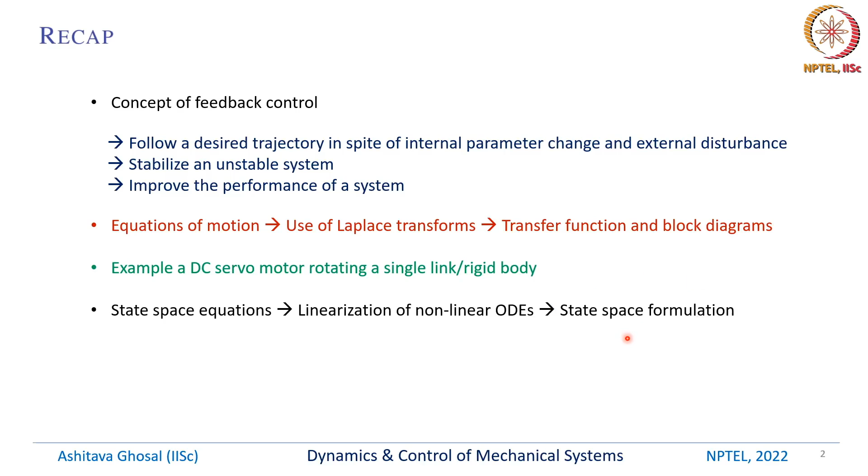Let us look at a broad classification of dynamical systems. Dynamical systems, which change with time, can be described by a partial differential equation or by ordinary differential equations. In our case, for a multi-rigid body system or even a single rigid body, we had ordinary differential equations, which can be of three kinds.

One is called SISO, single input single output systems. We could also have SIMO, single input multi output systems, and then the most general case, multi input multi output, or MIMO. The ordinary differential equation could also be linear or nonlinear.

If nonlinear, we could have time varying or time invariant systems. If time varying, the state equations can be written as x dot equals function of x, u, and t, where u is an external input and t is explicit time, since sometimes these equations have time explicitly in them. We could also have an output equation, y equals h of u, t.

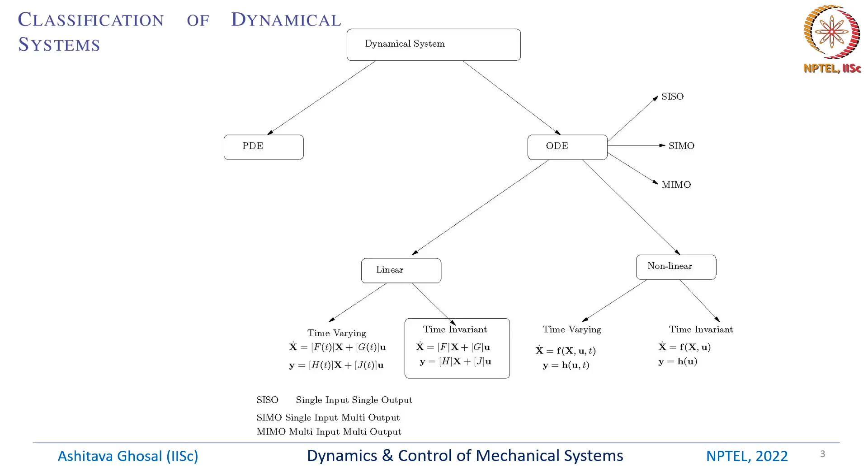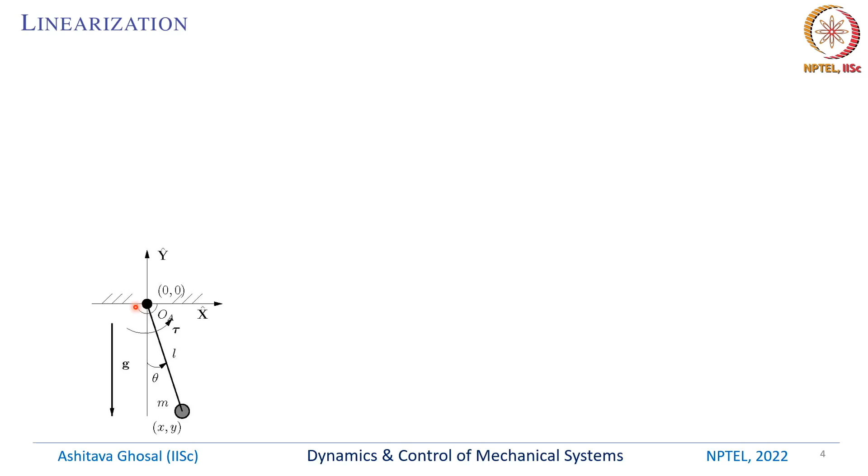So let's look at an example of linearization. We have this simple example of a pendulum, a massless rod with a mass at the end, rotating about this z-axis. The rotation angle is theta from the vertical. There is gravity acting, and we'll also assume there is a torque acting at this joint, applied by a motor.

So the nonlinear equations of motion for this pendulum, if you write it in state space form, we can write it as x dot equals f of x, u. If you want to linearize these nonlinear first order differential equations, we have to linearize about a point. Which point do we choose? Most of the time, the standard approach is to use linearization about an equilibrium point.

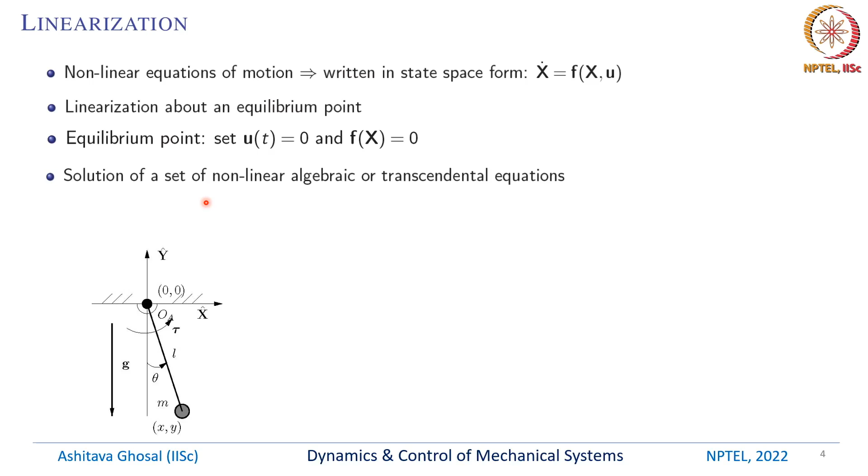How do we find the equilibrium point? It is obtained by setting u, which in this case is torque, equal to 0, and then we solve f of x equal to 0. This is a nonlinear algebraic equation. The solution of this set of nonlinear algebraic or transcendental equations will give me x, and these are the equilibrium points. It could be any algebraic or transcendental equation, but at least conceptually we can solve them. We find all x such that f of x equals 0, and more than one equilibrium point is possible.

So again, the example of the pendulum. The equation of motion is theta double dot plus g by L sine theta equals tau by mL squared, which we'll call u of t. Using state variables x1 and x2, where x1 is theta and x2 is theta dot, my state vector X is x1, x2, a 2 by 1 vector. In state space form, x1 dot equals x2, and x2 dot equals minus g by L sine x1 plus u of t. We derived these first order equations from the second order equation using x1 as theta and x2 as theta dot.

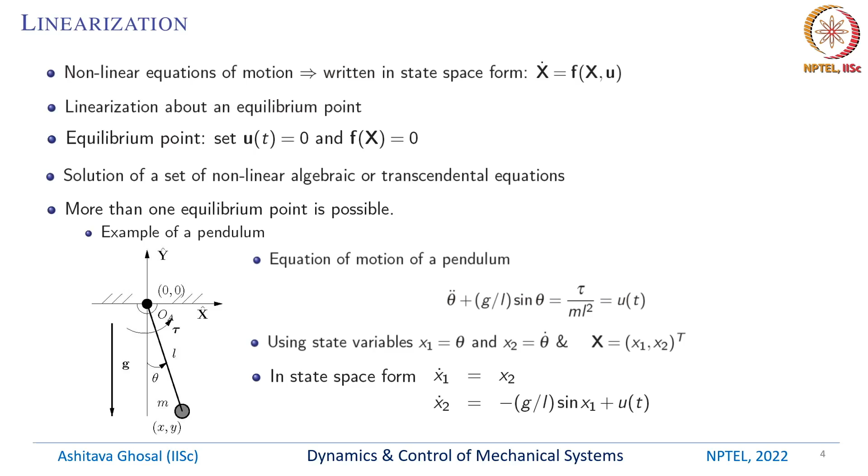Continuing with the simple pendulum example, we want to find the equilibrium point for those state equations. The first step is to set u(t) equal to 0. Then the function on the right hand side will be equal to 0 when x2 is 0 and x1 is equal to 0 or pi. If you linearize about x1, x2 equal to 0, 0, we substitute sine theta equals theta, and the two first order differential equations can be written in this form.

X1 dot is x2, as written in the previous slide, and x2 dot now becomes minus g by L times x1 plus u of t. It was g by L sine theta, but theta is the same as x1, so it's minus g by L x1. This is the F matrix and this is the G vector in this case.

If you want to linearize about pi, 0, remember x1 could also be pi. What is pi? It is standing vertically upwards. What is x1 equal to 0? The pendulum is hanging down. So if you linearize about pi, 0, you get sine(pi plus theta), which is minus sine theta, giving you minus theta, since for small theta, sine theta is the same as theta.

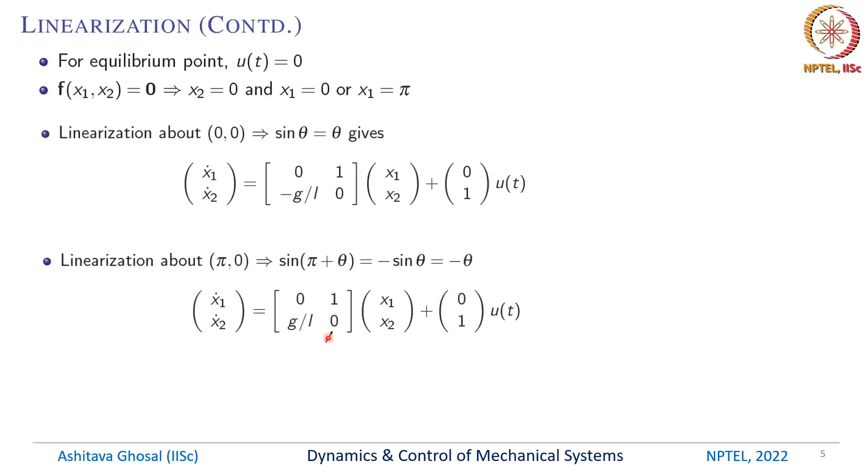So in general, what can we do? We can use Taylor series. Instead of simply saying sine theta is the same as theta and doing these simple things, we can formally linearize any nonlinear differential equation using Taylor series, and again we linearize about an equilibrium point.

So let's assume we have a set of nonlinear differential equations, x dot equals f of x comma u, where x is an n by 1 vector and u is an m by 1 vector, so the number of inputs could be less than the number of states. So x is an element of Rn and u is an element of Rm.

We are going to linearize about an equilibrium point. What is the equilibrium point? All x comma u such that x dot equals 0, which implies all x comma u which satisfy the vector nonlinear set of equations f of x comma u equal to 0. These are nonlinear algebraic or transcendental equations, so you can have more than one solution for f of x comma u equal to 0.

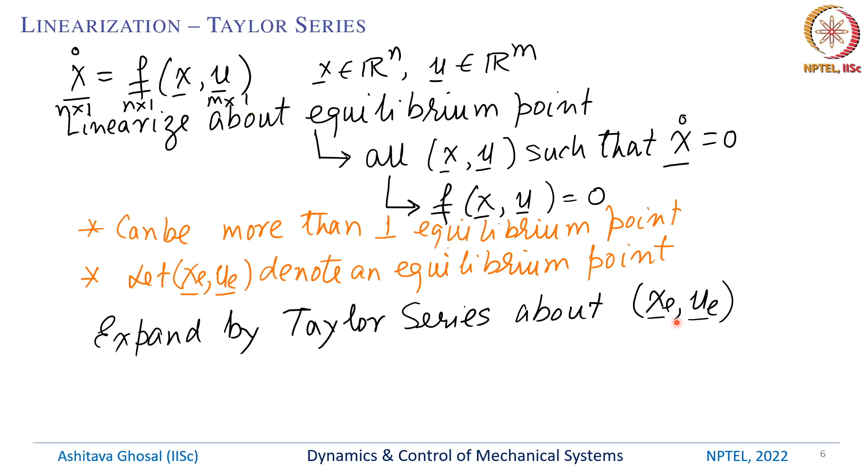So basically we can have more than one equilibrium point, and we need to linearize about a chosen equilibrium point. Let xe comma ue denote the equilibrium point we are interested in. We can expand the right hand side using Taylor series about xe comma ue. What is the expression for Taylor series?

So any one of these functions, let's say fi of x comma u, can be written as fi of xe comma ue plus the partial of fi with respect to xj, for j equals 1 through n, evaluated at x equals xe and u equals ue, times delta x. This is the first term in the expansion of the Taylor series.

And what is delta x? It is xj minus xj at the equilibrium point.

We can also look at the partial of fi with respect to uk, because remember there is an x and a u. So for k equals 1 through m, summation of partial fi with respect to uk, again evaluated at x equals xe and u equals ue, multiplied by delta u, and delta u is uk minus uke, and then plus higher order terms, order 2 and order 3.

So we are going to drop all the higher order terms, and the first term is also equal to 0. Why? This is the definition of an equilibrium point, so fi of xe comma ue must be equal to 0.

So what you are left with is one part which is the partial of fi with respect to xj times delta x, and the partial of fi with respect to uk times delta u. Both of these terms can be written as x tilde dot equals some matrix F times x tilde plus some matrix G times u tilde.

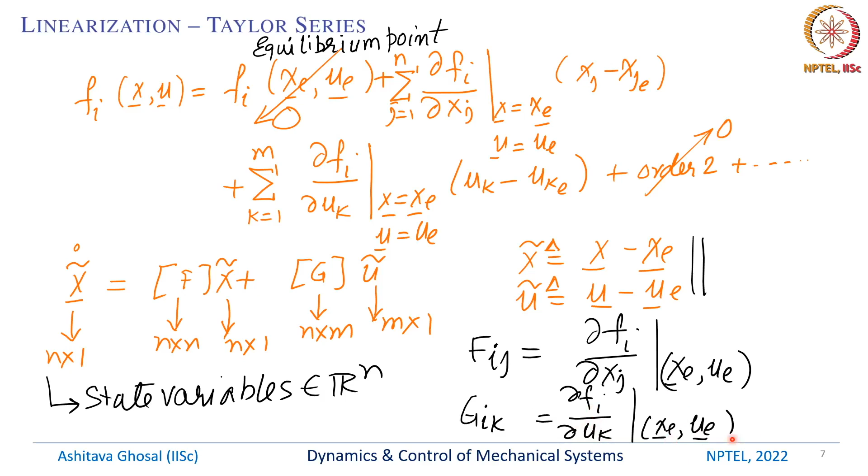Similar to the state equation, we can also look at the output equation. Here we assume y denotes the output, which is also a vector, but there are only p of them. So the number of state variables is n, the number of u is m, and the number of measurements or output variables is p.

And p will be less than or equal to n. Again, we can use Taylor series to expand this nonlinear equation about xe and ue. Similar to the state equations, we get y tilde equals some matrix H into x tilde plus some matrix J into u tilde. What is ye? It is the equilibrium point, the function h evaluated at xe, ue, and y tilde is y minus ye.

So what are the elements of the H matrix? Hij can be written as the partial of Hi with respect to xj, evaluated at xe, ue. The elements of the J matrix are obtained as the partial of Hi with respect to uk, again evaluated at xe. So what are the dimensions of y?

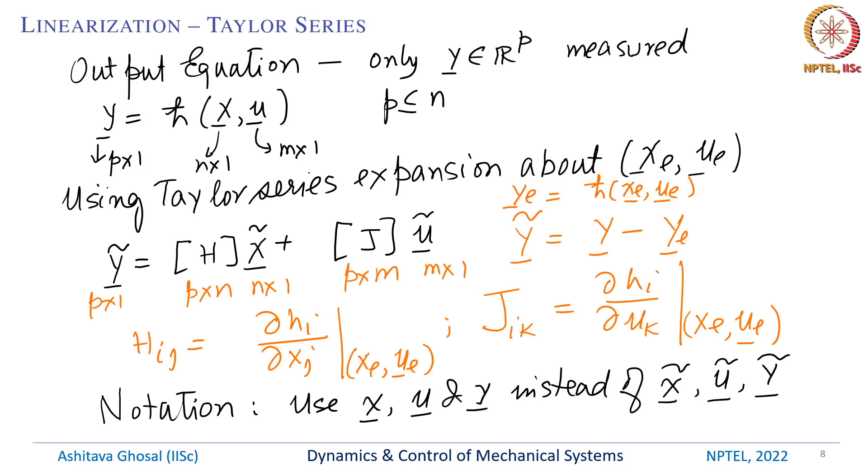So in summary, we can obtain the state space formulation of a linear time invariant system in two sets of equations. One is the state equation, x dot equals F into x plus G into u, where x is an element of R^n and u is an element of R^m. Then we have an output equation, y equals H into x plus J into u, and y is an element of R^p.

So to repeat, x are the state variables, with dimension n cross 1. u are the control inputs, with dimension m cross 1. y are the outputs or measured outputs, with dimension p cross 1.

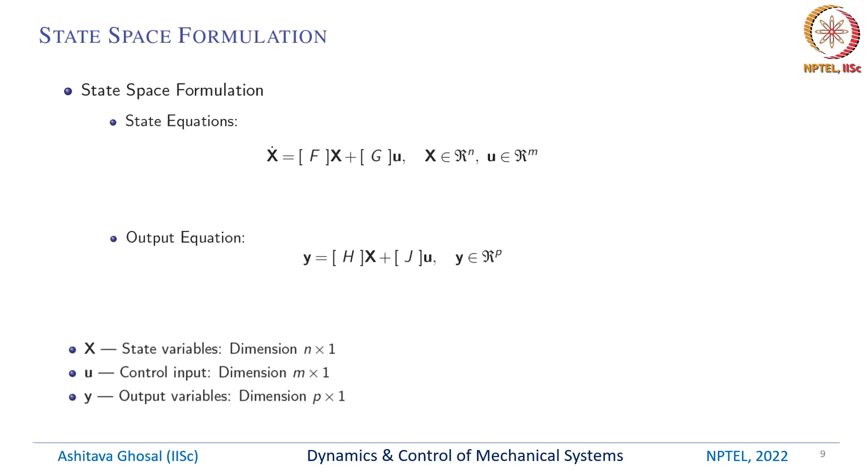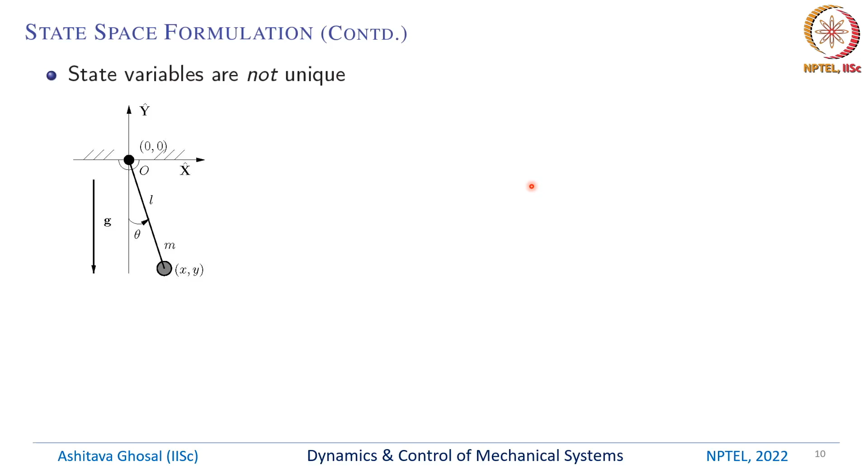Let us continue. One of the most basic issues in state space formulation is that state variables are not unique, and I will show you an example using this planar pendulum again. We have a pendulum with a mass oscillating with angle theta, gravity acting this way, and we had chosen the two state variables x1 and x2 as theta and theta dot.

We could also use another set of state variables, x1 tilde and x2 tilde. x1 tilde is defined as omega0 times theta, and x2 tilde is the same as theta dot, so x2 tilde is same as the earlier x2. However, x1 tilde is a scaled version of the previous x1, where omega0 squared is g by L.

Now if you obtain the state equations, you get x1 tilde dot equals omega0 times x2, and x2 tilde dot equals minus omega0 squared sine of x1 divided by omega0, plus u of t. If we linearize about 0,0, we get, in terms of x1 tilde and x2 tilde, like x dot, an F matrix of 0, omega0, minus omega0, 0, times x1 tilde, x2, plus 0 and 1 times u of t. You can see that the F matrix has changed.

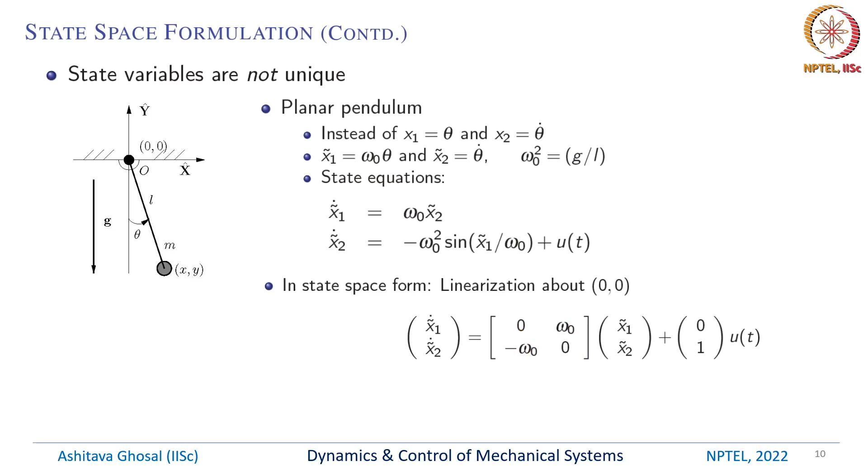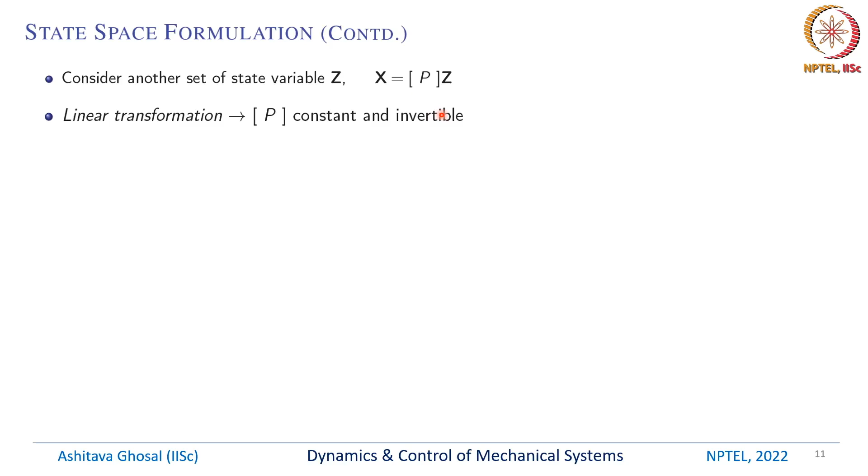In general, we can have another set of state variables z, related to x by a linear transformation: x equals P times z, where P is constant and full rank, so P is invertible. Since x is n by 1, z is also n by 1, and P is an n by n constant, invertible matrix.

Now in terms of z, we can write the state and output equations in this form. Recall we had x dot equals F x plus G u.

Now we have x is pz, so p into z dot is f into pz plus g into u. Remember, p dot is 0. So if you were to worry about what happened when you did x dot, should we get a p dot into z? No, that term is 0. So x dot will be p into z dot, which is what is here.

And likewise, we have y is h into p into z plus j into u. So we could rewrite these state and output equations as z dot is p inverse f p z plus p inverse gu, and y is h p z plus j into u. Remember, p is invertible, so p inverse exists.

So the first basic question is, how do we know that both these systems are the same? If you are an analyst using x as your state variables, you would have got x dot is equal to fx plus gu. If you are another analyst using z as your state variables, you will get z dot is p inverse f p z plus p inverse gu, and the output equation is y is h p z plus j u. So it is not clear, and remember these are all numbers, that we are describing the same system. So what is common between this description using z and the previous description using x? Let's continue.

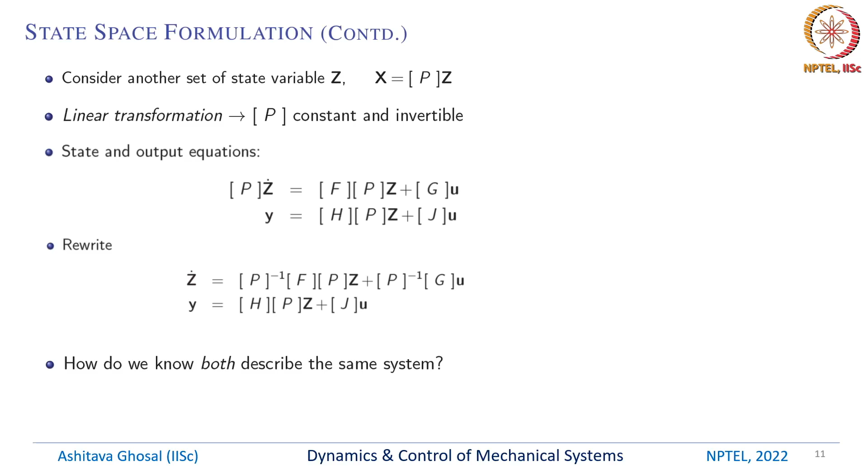So what is common between F and P inverse FP? Let's start with that. One important thing, if you have studied linear algebra, is that you can look at the eigenvalues of this F and P inverse FP. So what is the eigenvalue problem? We have to solve a characteristic polynomial, which comes from setting the determinant of lambda I minus P inverse FP equal to 0, where I is the identity matrix.

So this we can simplify as determinant of lambda into P inverse P, since I could be written as P inverse P, minus P inverse FP, equal to 0. Again we can simplify and write this expression as determinant of P inverse times lambda I minus F times P. So basically we take P outside, giving P inverse times lambda I minus F times P equal to 0. The determinant of a product of three matrices is the product of the determinants of each one. So we can write determinant of P inverse, then determinant of lambda I minus F, and then determinant of P, equal to 0.

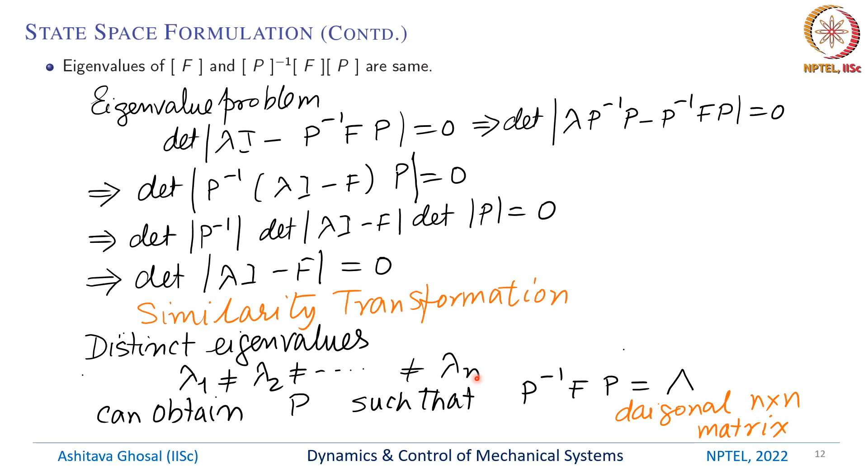So how do I find out what P is? Firstly, P is an n by n matrix because we are doing P inverse F into P, so all of them are n by n matrices. There is a very nice formula to obtain P. This is called the Vandermonde matrix. You can look at this very good book on linear algebra by Golub and Van Loan.

So what it says is, to obtain this P, we put in the first column 1, lambda 1, lambda 1 square, all the way till lambda 1 to the power n minus 1. The second column is 1, lambda 2, lambda 2 square, all the way till lambda 2 to the power n minus 1, and the last, nth column is 1, lambda n, lambda n square, all the way till lambda n to the power n minus 1. And remember, we are discussing the case where lambda 1, lambda 2, all the way till lambda n, are distinct eigenvalues.

So if you were to use this matrix P, then P inverse FP will be a diagonal matrix with lambda 1, lambda 2, all the way till lambda n on the diagonal, and all other elements are 0.

If lambda 1 is equal to lambda 2, so let's say two of them are repeated, then the P matrix can also be determined. The first column of the P matrix is 1, lambda 1, lambda 1 squared, all the way to lambda 1 to the power n minus 1. The second column, corresponding to lambda 2, is 0, 1, 2 lambda 1, all the way.

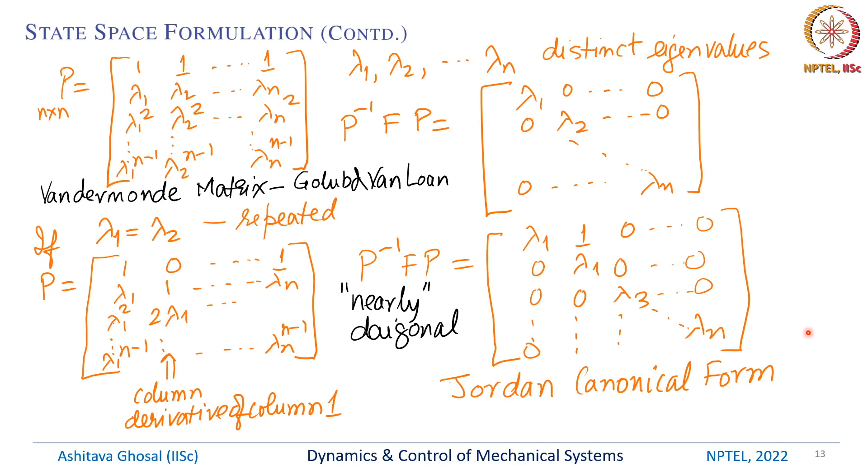So while you are solving for the eigenvalues of a matrix, you can also get complex eigenvalues. So we can have a lambda 1 which is a plus ib. The second eigenvalue will be a minus ib. This is a property of complex numbers. So one of them is an eigenvalue which is a plus ib, the other one must be a minus ib.

So in that case, if you do P inverse FP, what you can see is you will get AB minus BA, and again, since we are taking only two of them equal, you will have lambda 3 all the way till lambda n, and all the off-diagonal terms to be 0. So this is the best we can do if you have complex conjugate eigenvalues.

Of course, there could be more complications. You can have many of these eigenvalues equal. So if there are three of them equal, then you will have some things happening in the first column of P, the second column of P, the third column of P. The third column is the derivative of the second column, which is the derivative of the first column, and so on. So you will have some more complications. It will not be exactly diagonal, but it is still a Jordan form.

You can also have repeated complex eigenvalues. You can find out what happens when you have repeated complex eigenvalues, what happens to P inverse FP. So this diagonalization or this Jordan canonical form are very useful for state space formulation. We will see that in the next few slides.

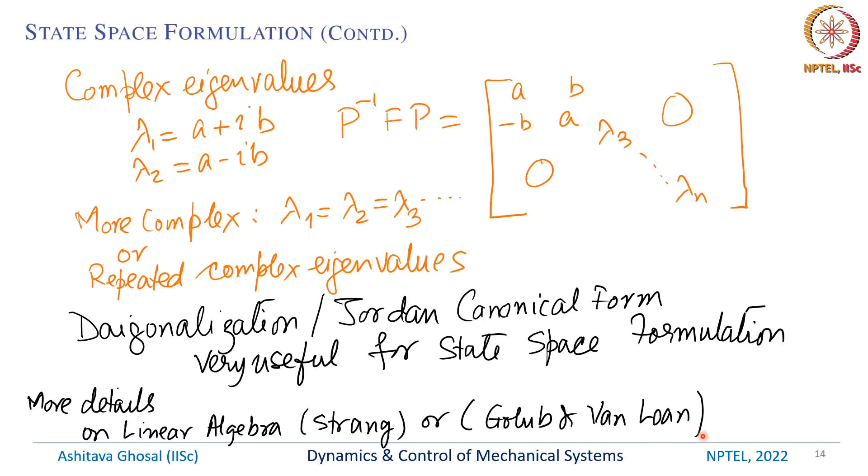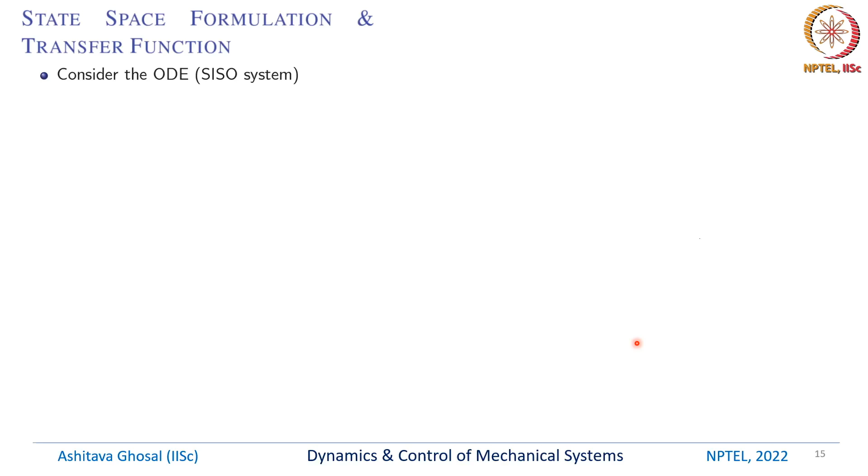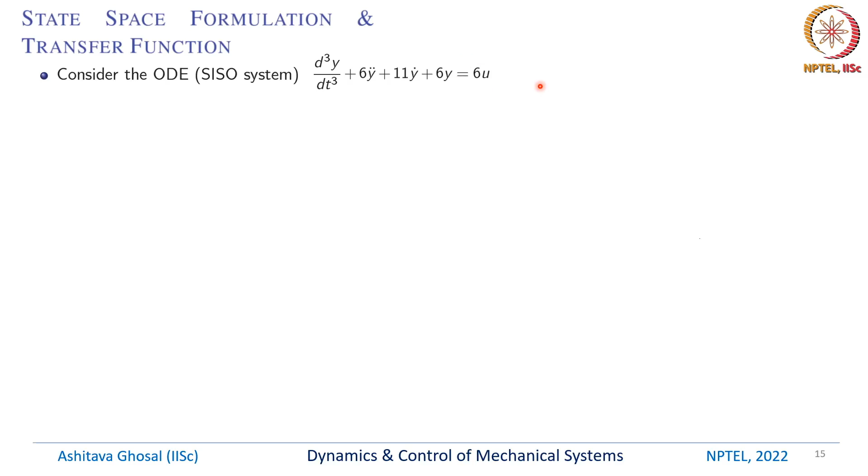So let's go back to state space formulation and transfer function. Let's consider an ODE, and in particular a single input, single output system. The ODE is given in this form: the third derivative of y with time, plus 6 y double dot, which is the second derivative of y, plus 11 y dot plus 6y is equal to 6u. This is my ordinary differential equation describing a single input, single output system.

So if you were to use Laplace transform on this, what will you get? The output is y of s, input is u of s. So this will be s cubed into y, this will be 6 s squared into y, this will be 11 s y, and this is 6y. All the initial conditions are 0 — whenever we take Laplace transform, we assume that the initial conditions are 0. So what is the transfer function between y and u?

It is 6 divided by s cubed plus 6s squared plus 11s plus 6. I have chosen this example because we can now very simply do a partial fraction expansion of this.

If you remember what a partial fraction is, we can write this as a divided by s plus something, plus b divided by s plus something, plus c divided by s plus something. It turns out it can be written as 3 divided by s plus 1, minus 6 divided by s plus 2, plus 3 divided by s plus 3. So this transfer function y of s divided by u of s can be written as the sum of these three fractions.

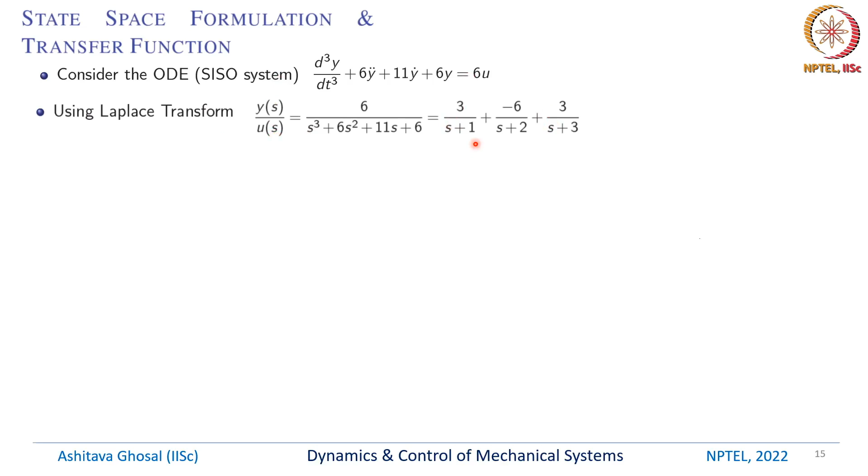So in the block diagram form, I can represent this as follows. I have an input u of s and output y of s. First, this is multiplying by 6 u of s, and 6 into u of s is given by y times s cubed plus 6s squared plus 11s plus 6. So that could be written in this way.

So what do we have here? We have a block which is 1 by s, called an integrator. Remember, the Laplace transform of 1 by s into something is nothing but the integration of that quantity. So we have 1 by s, and the output of that you multiply by minus 6, and then put it back here.

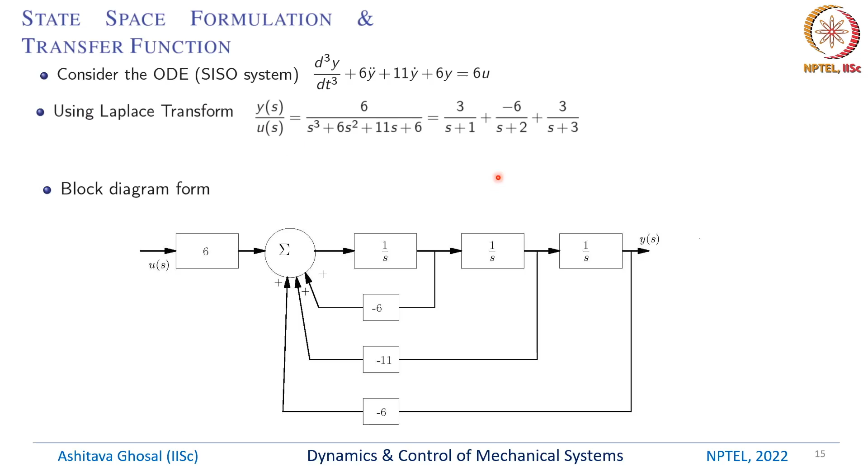Let's look at the state space form of this equation. This is a third order ODE, so there are 3 state variables. The first equation is x1 dot is x2, x2 dot is x3, and x3 dot is minus 6x1 minus 11x2 minus 6x3 plus 6u.

What is the output variable? That is x1. So we can rewrite these three first order equations as x dot equals f x plus g u. What is x here? It is 3 by 1, a vector of x1, x2, x3. So x dot is x1 dot, x2 dot, x3 dot, which equals f into x.

What is the first row of f? You can see from this equation that x1 dot is nothing but x2, which is 0, 1, 0 into x1, x2, x3. The second equation is x2 dot equals x3, so the second row of f will be 0, 0, 1. Then the third equation is x3 dot equals minus 6x1 minus 11x2 minus 6x3 plus 6u, so this row is minus 6, minus 11, minus 6.

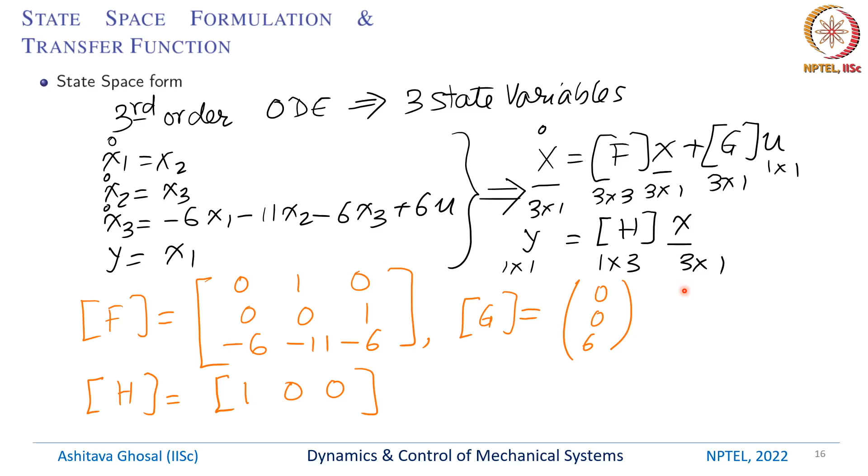How about the output equation? Y is equal to h x. What is the single measurement we are doing? A single output, which is x1, so h is 1, 0, 0 into x. So y is 1, 0, 0 into x1, x2, x3, meaning y is equal to x1.

The eigenvalues of f are obtained by solving the determinant of f minus lambda I equals 0. Since f is a 3 by 3 matrix, the characteristic polynomial would be cubic, and when you expand it using all the elements of f, you get lambda cubed plus 6 lambda squared plus 11 lambda plus 6 equals 0.

So the characteristic polynomial is same as the denominator of the transfer function. This is a very, very useful observation.

And what are the roots of the polynomial? They are lambda 1 is minus 1, lambda 2 is minus 2, lambda 3 is minus 3. So these are distinct roots.

Okay, so hence we can find P using that Vandermonde matrix. Remember, the first column was 1, then lambda 1, then lambda 1 square. Second column was 1, lambda 2, lambda 2 square. Third column was 1, lambda 3, lambda 3 square. Okay, so lambda 1, lambda 2, lambda 3 are given here.

We can compute lambda 1 square, lambda 2 square, lambda 3 square and all the terms, and we will get P, which is this. P inverse can also be calculated. This is a reasonably simple matrix, and you can also go back and use MATLAB.

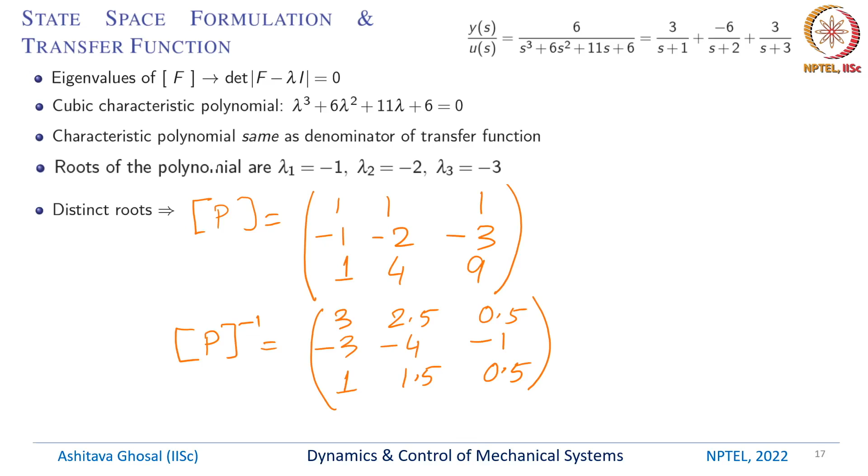So as I said, let us choose a new state variable z, which is x equals P times z. So the state equations in terms of z are z dot is P inverse F P z. Go back and see the formulation, and then P inverse G u.

So what do we get? We know what is P, we know what is F, so you can substitute and we can do some simplification. Okay, then you will get z1 dot, z2 dot, z3 dot, and what do we expect? We expect it to be diagonal. Remember, P inverse F P will become a diagonal matrix. That was the purpose of finding that P matrix.

So Z1 dot will be equal to minus Z1 plus 3 into U. Z2 dot is minus 2 Z2 minus 6 into U, and Z3 dot is minus 3 Z3 plus 3 into U.

And how about the output equation, which is y is equal to H into P into z. Again, P is, we know that. So what you will see is, if you simplify this, you will get 1 1 1 into z1 z2 z3. So what have we got?

So we had one form which is x dot is equal to Fx plus Gu, and now we have another form which is z dot is equal to some matrix times z plus some other matrix times u, and likewise we had y is equal to Hx. Now we have y is some matrix times z.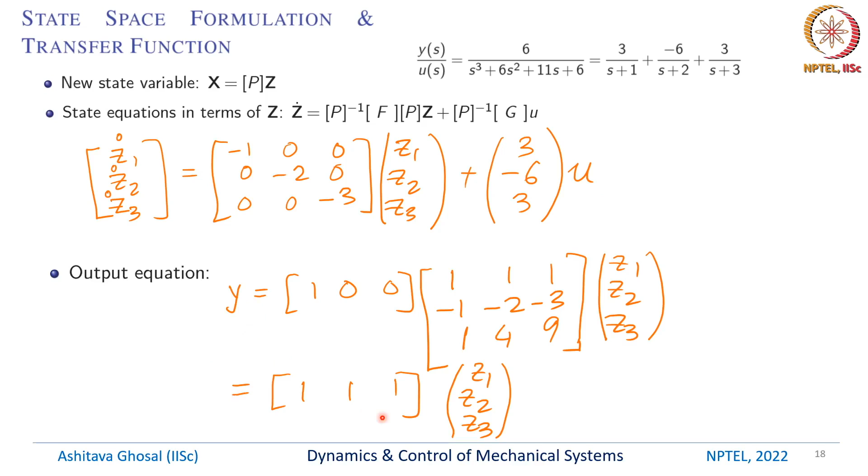So let's write this transfer function in a block diagram form. Okay, so now what you have is u, which is coming in, and then you can see that you have to multiply u by 3, minus 6 and 3, and then whatever is the output here you integrate once and you will get z1, and then you feed back minus 1.

Similarly, whatever you integrate, you will get z2, and then whatever you have you integrate here, output of this input, and you will get z3. And then when you add z1 plus z2 plus z3, you will get y of s. Remember, y is 1 1 1 into z1 z2 z3.

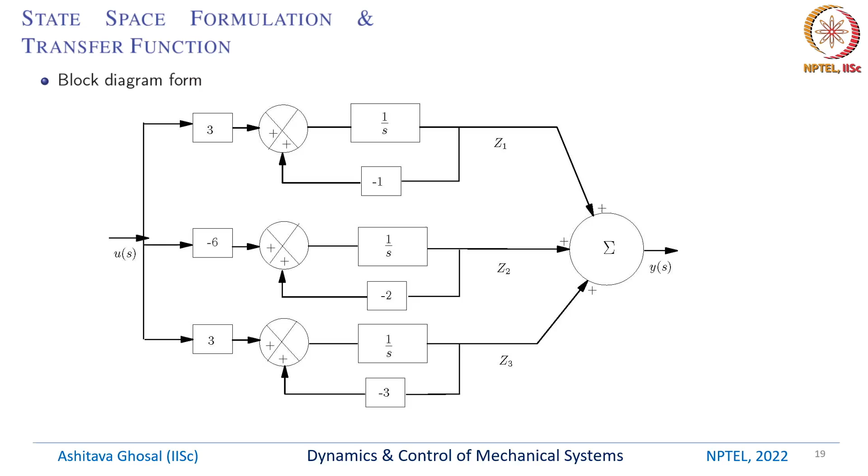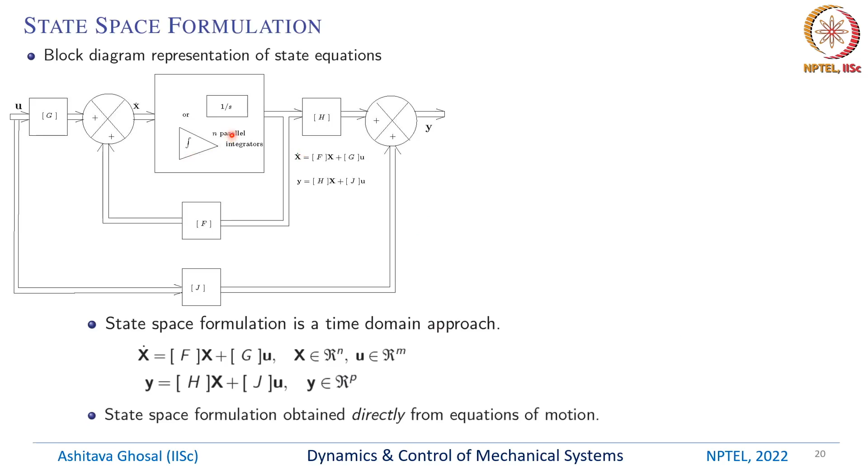So in general, if you have a system, which is x dot is equal to Fx plus Gu, and y is equal to Hx plus Ju, we can also write it symbolically in a block diagram form. So this is the block diagram representation of the state equations.

So what do we have? We have u, which is coming in. So this is G into u. Okay, and then we also need to add F into x. So we will get x dot, which is F into x plus G into u.

And how do I get x here? That is the integral of this x dot. So that is what is shown here. You will have a 1 over s. Actually, if it is a vector, you will have n parallel integrators. So each of those x dots needs to be integrated, and you will get one x. You multiply by F, and then you add to Gu, you will get x dot.

So this is the feedback part. The output of this integrator is x, so you can multiply it by H, and you also need J into u.

So you take this u, which is the input, directly multiplied by the j matrix, and then you add these two and you will get y. So this is a nice way to represent what is happening in the state equations. If you just have state equations like this, x dot equals fx plus gu, and y equals hx plus ju, then you don't see this nice structure where there is integration happening: input to the block is x dot, output after integration is x, and then you can feed back.

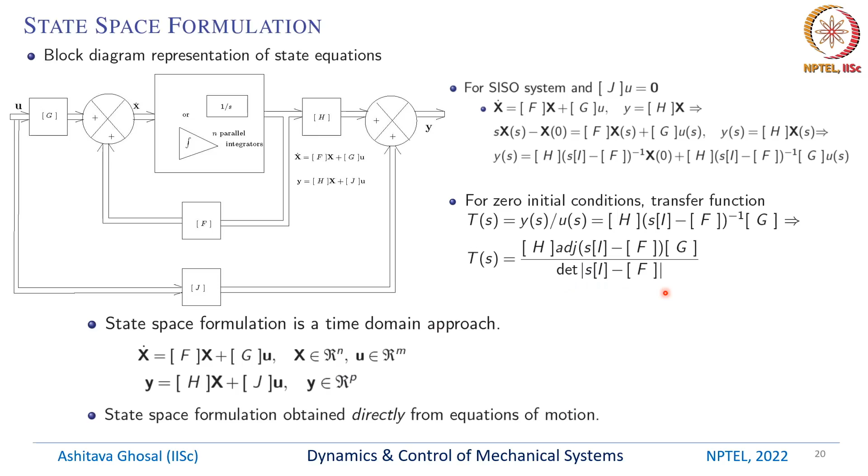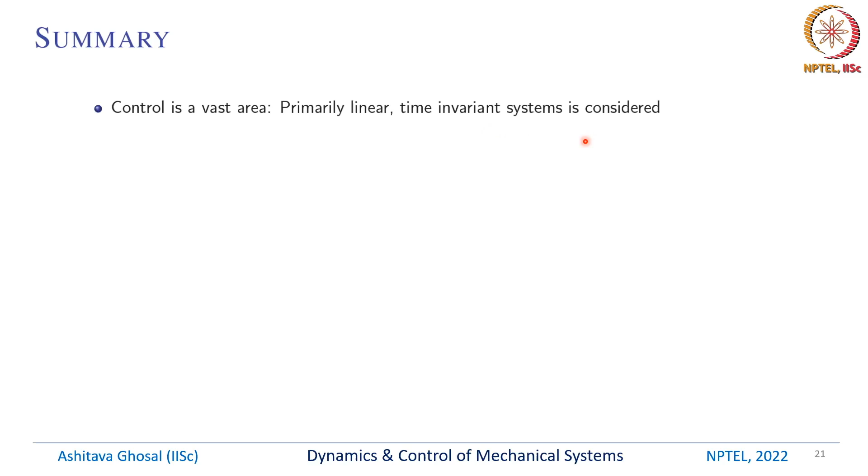In summary, control is a very vast area. We have linear systems, nonlinear systems, linear time invariant systems, linear time varying systems, SISO systems, MIMO systems - all kinds of classification of dynamical systems. It is a very vast area. We were primarily interested in linear time invariant systems.

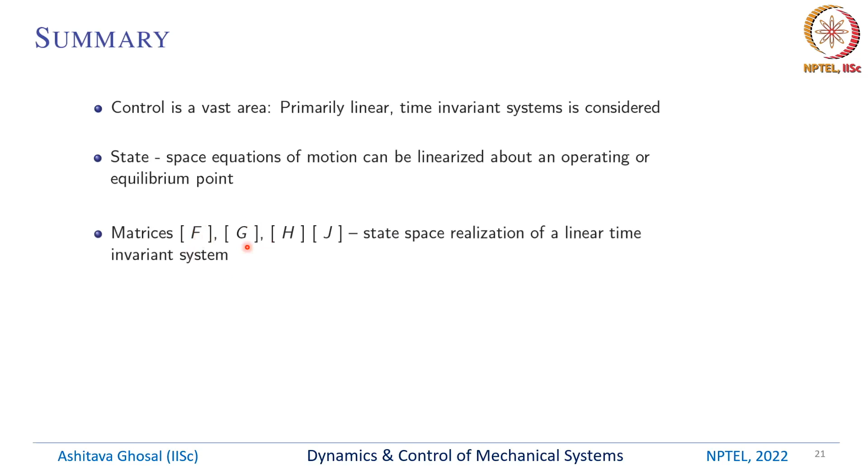We can obtain the state space equations of motion from the dynamics of the system. They can be linearized about an operating or equilibrium point, and then we get these matrices F, G, H, and J. These four matrices are sometimes called the state space realization of a linear time invariant system. If F was a function of time, and H is also a function of time, then you'll have a linear time varying system.

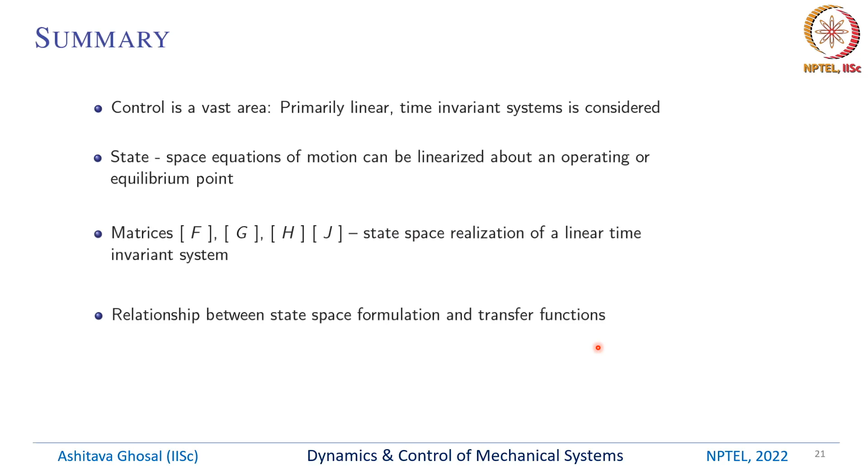And I showed you there is a relationship between the state space formulation and the transfer function. So the transfer function for the SISO system, y of s divided by u of s, is nothing but h into (si minus f) inverse into g.